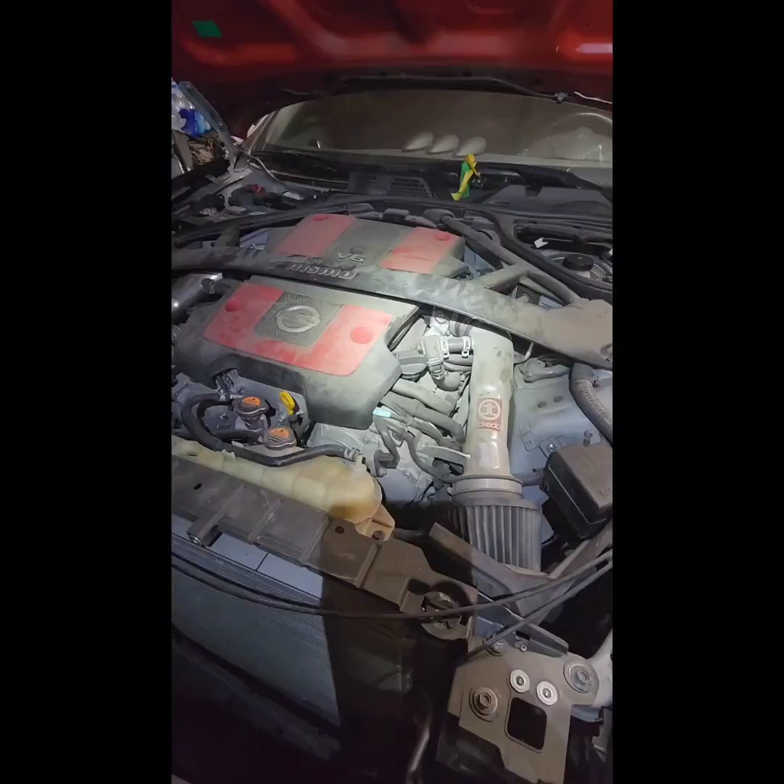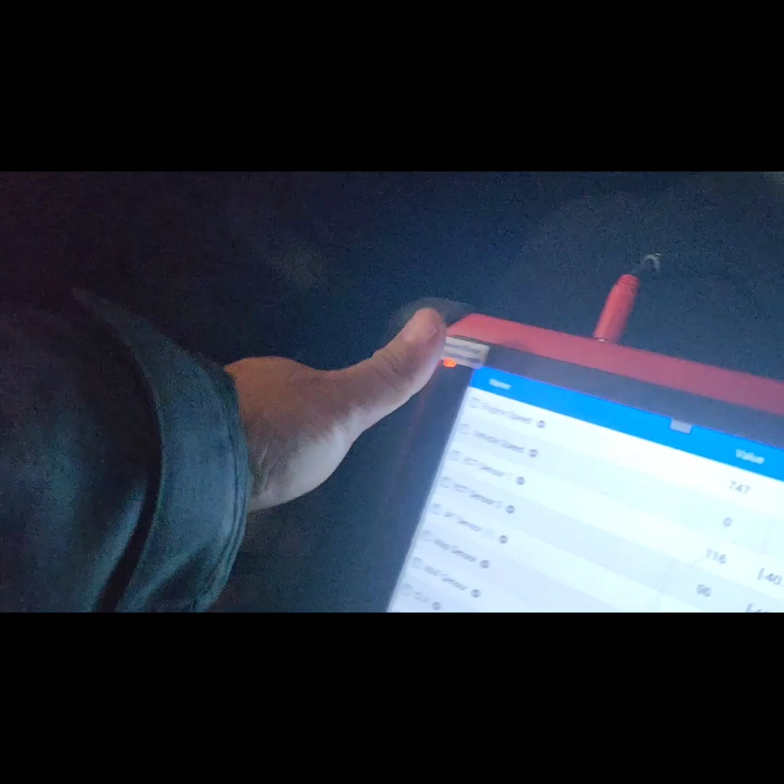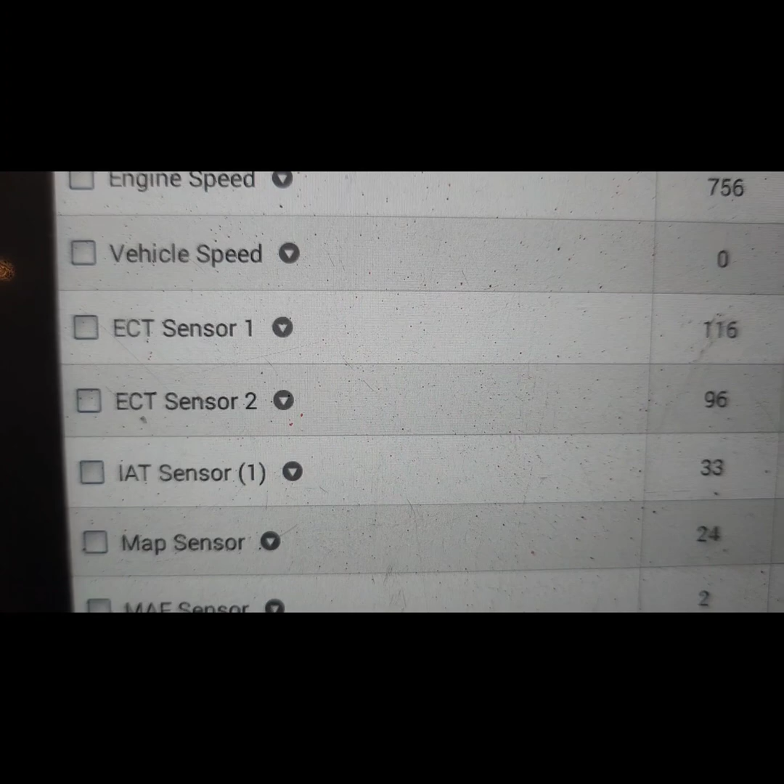Alright, so I got a check engine light on. See the temperature? It's almost on high. And I have a scanner here. So it says on the sensor one, 116 degrees. So it's overheating. And the sensor 2 is 96 degrees.

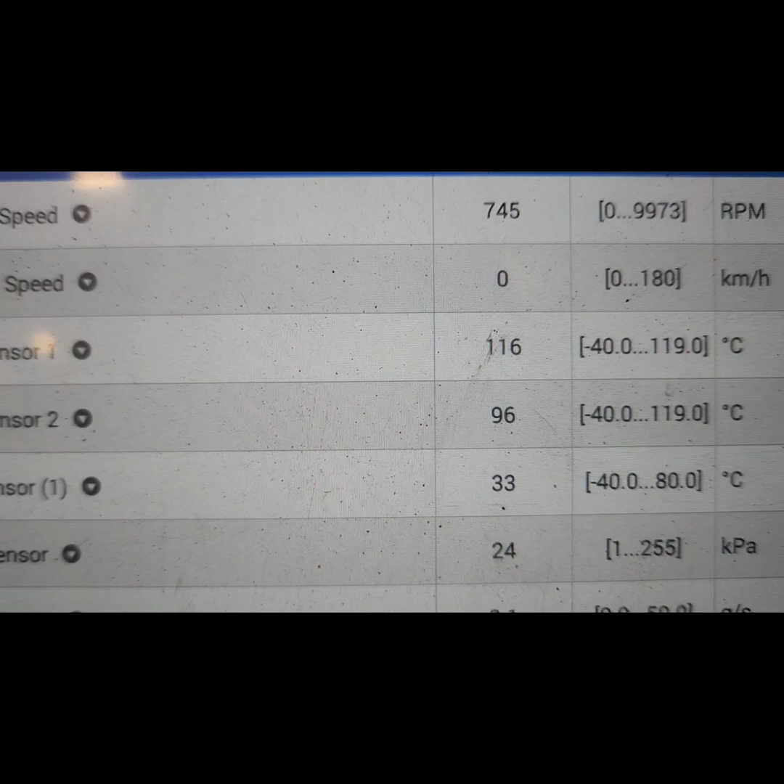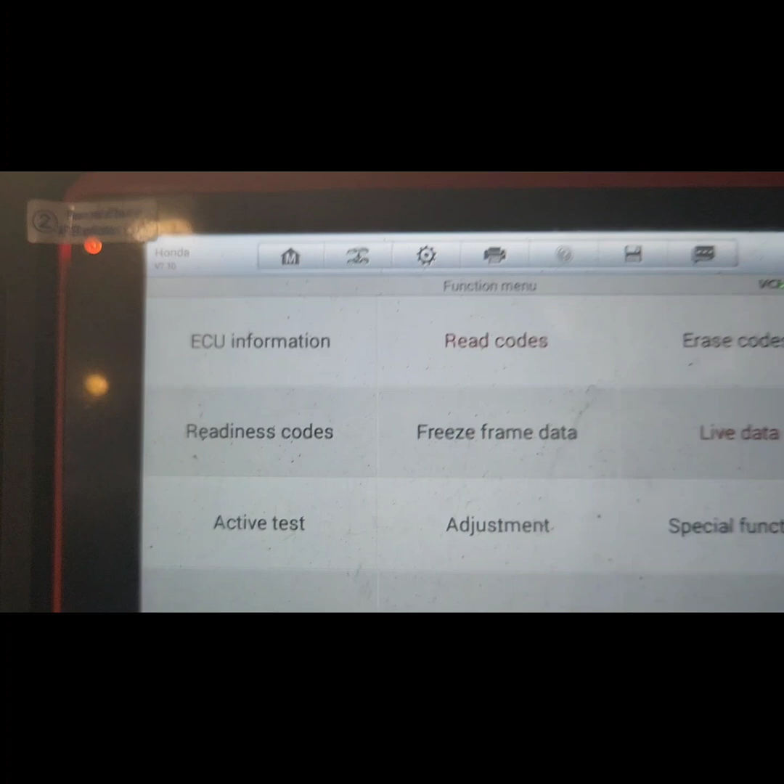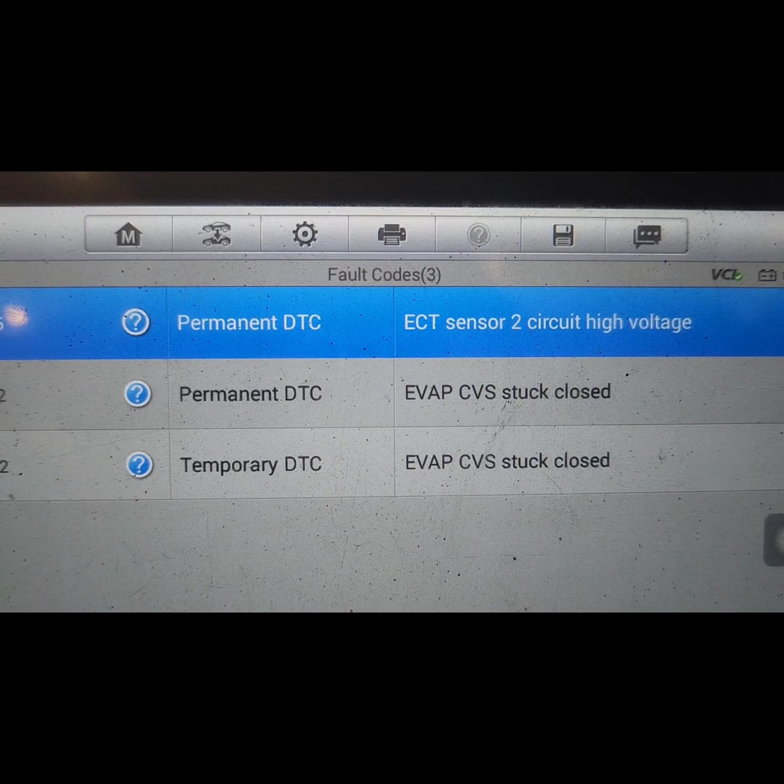So actually this thing calls on the code. It's calling for the P2185, sensor 2 circuit high voltage. So I'm gonna have to find out what's gonna happen, but most likely it's probably just the sensor.

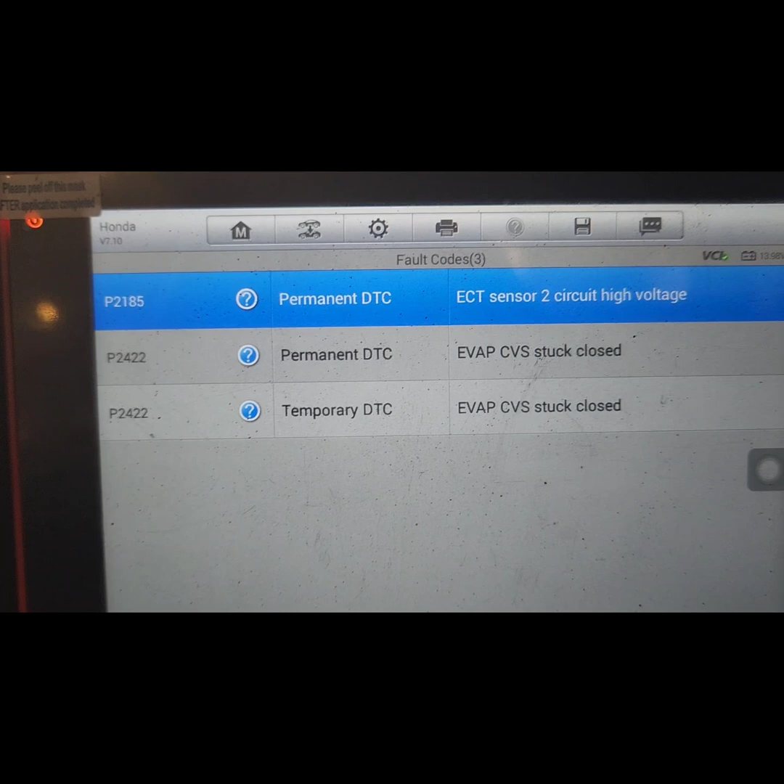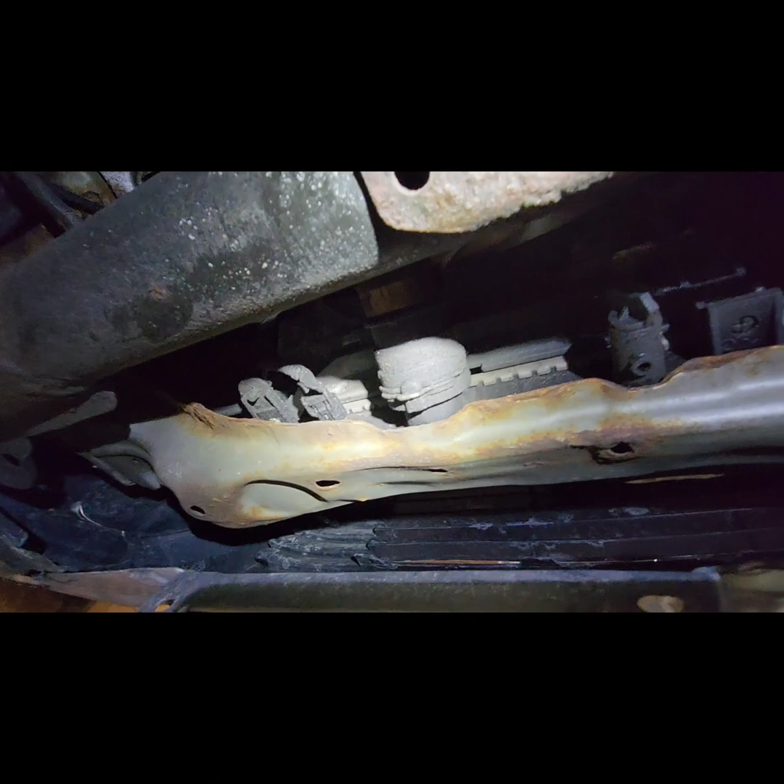So let's fix this. Alright, here we are underneath. So this is the radiator, this is the front of the vehicle, right? And the sensor is right here. This is on the driver's side. As you can see, this is the problem.

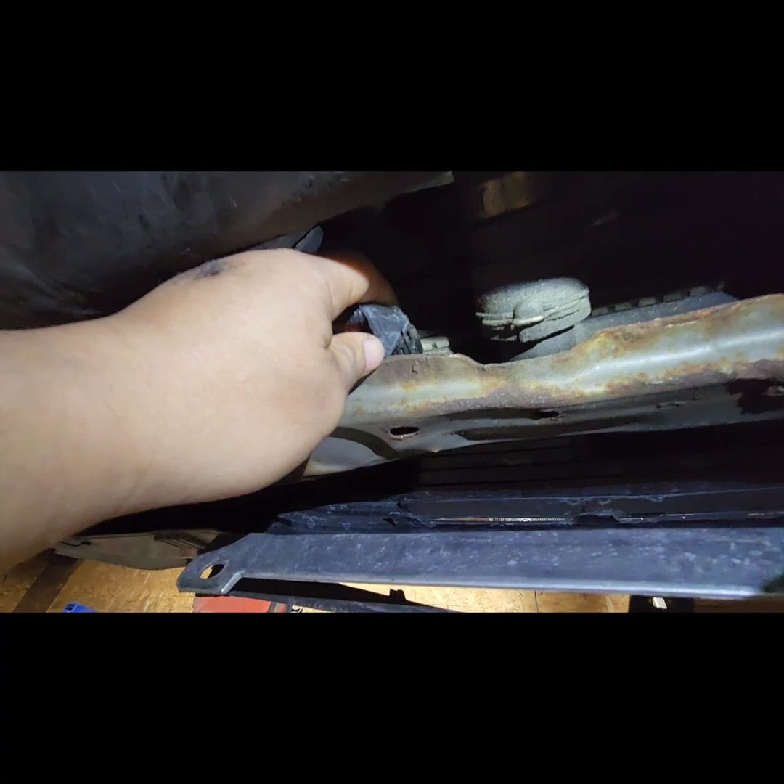So I might as well replace this because it's an old sensor. It's not that big a deal. It's not that expensive. So let's just unplug this, push this tab here, and kind of wiggle it out. It's gonna take time because it's sat there forever. Or you're gonna get a screwdriver.

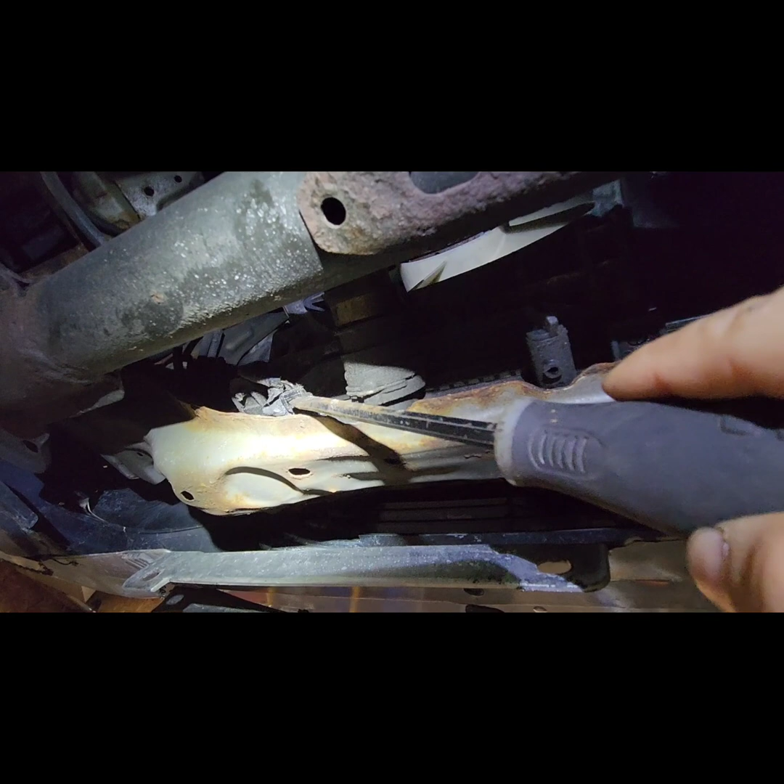So here we are with the screwdriver. As you can see, the tab is already pressed in, right? Because I pulled it out a little bit, so now the tab didn't come back. So all you have to do now is just pry it like this, just slowly. Not a lot of pressure. There you go. Right, so now it's out.

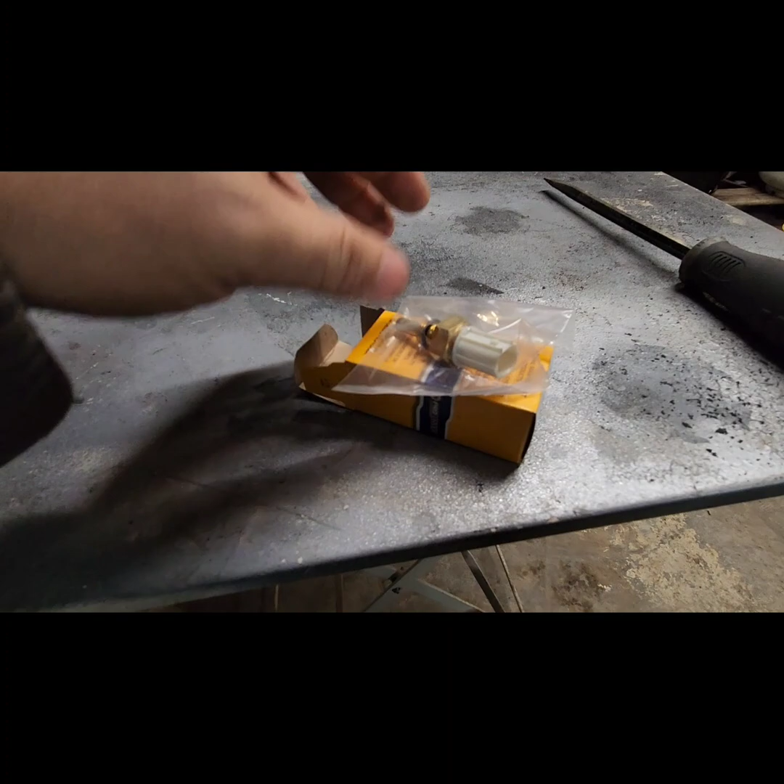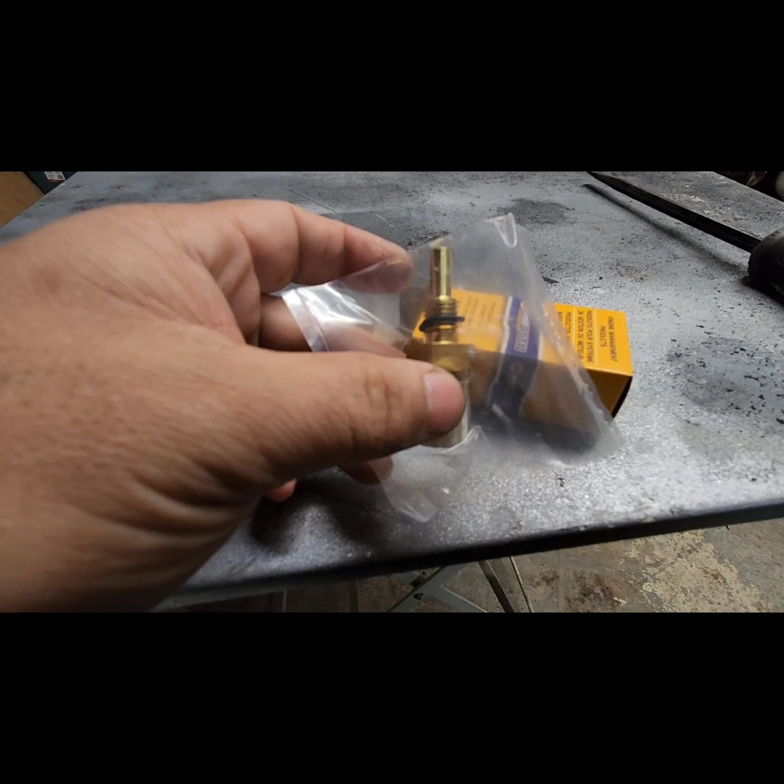So let's remove this sensor here and replace it. Alright, so here's my sensor, aftermarket sensor, right? So let's just hope that this sensor will work. Alright, so you're gonna need a 17mm wrench socket, deep socket, and then

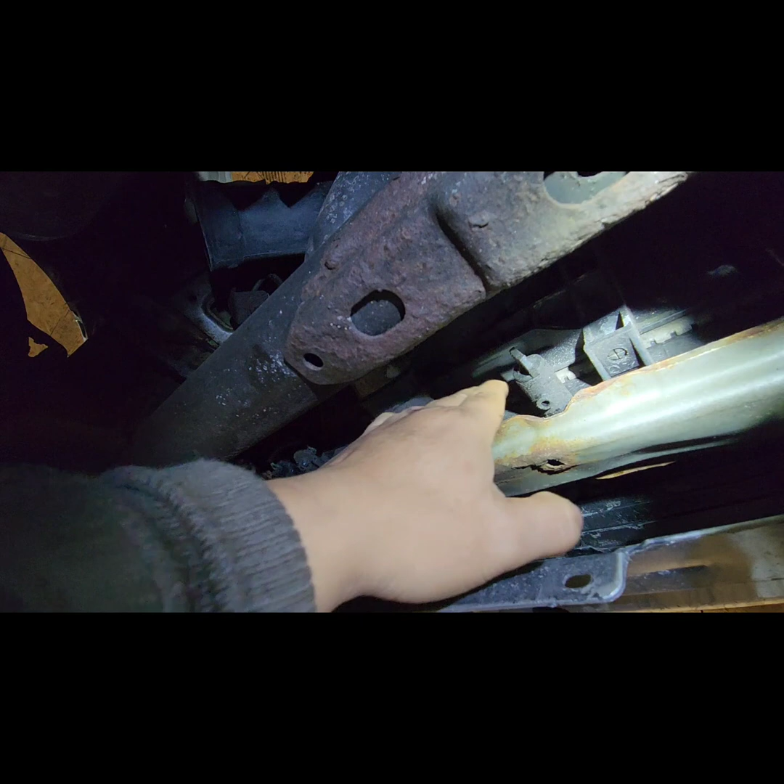you should loosen this. Now it's loose, but make sure you don't take the cap off the radiator, because if you do, all the coolant will come out. So leave the cap, keep it sealed, to minimize the coolant coming out, because it will have that vacuum.

And then we're gonna swap the new sensor right away, right? Because, well, normally you have to drain the coolant to do this, but I just replaced this coolant not long ago. So that's why I don't want to do that. So let's loosen this up and very quickly replace it with the new one.

Right? So put the sensor back as quickly as you can, and make sure you have the O-ring too on that sensor, right? Because it's got an O-ring there. Make sure you have a new O-ring on that sensor.

And tighten it up, and don't put too much pressure here, because this is plastic. The radiator is plastic, so just enough to seal. That's it. It's almost like hand tight. And put the plug in. And that should be it.

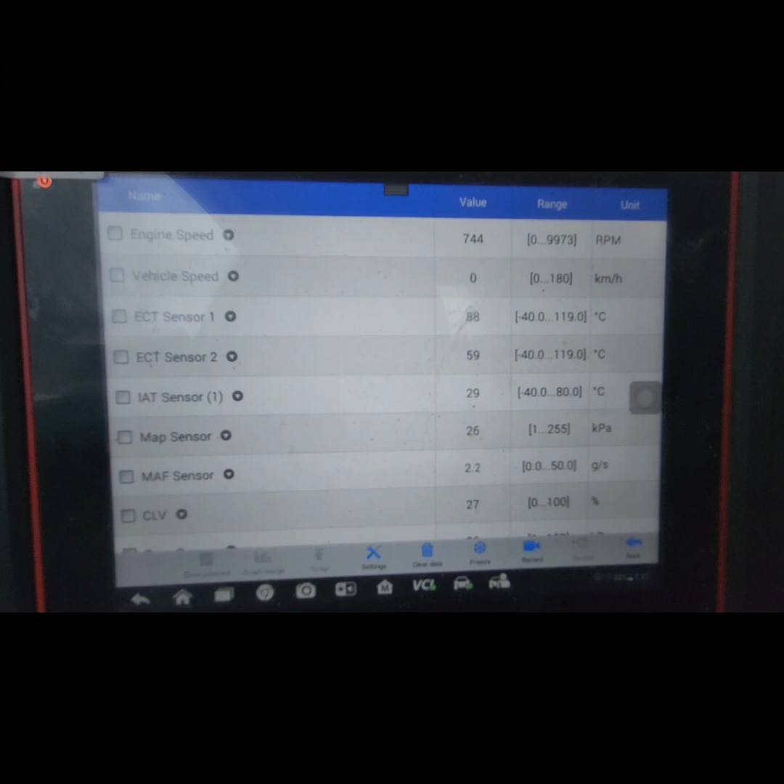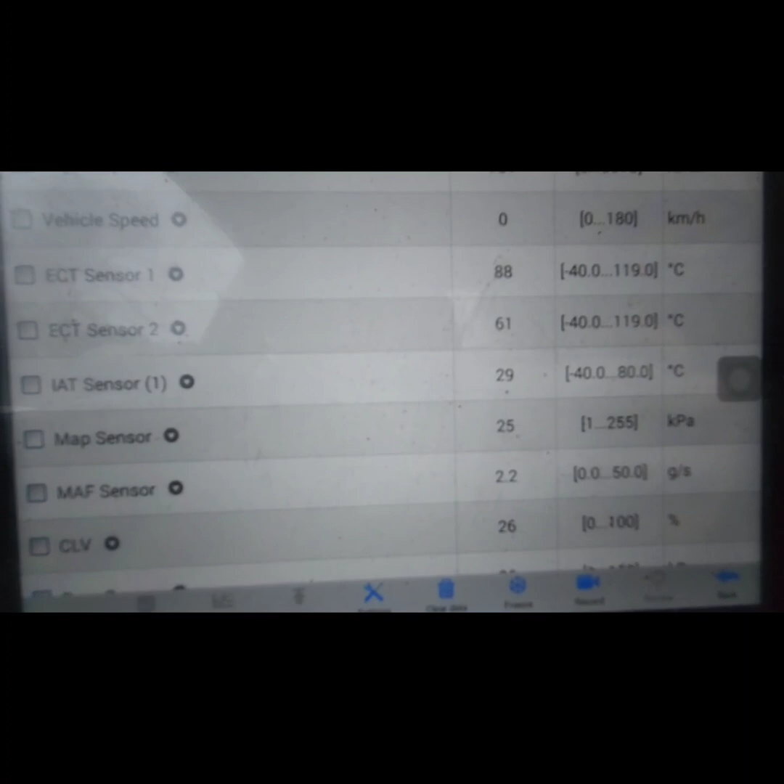Alright, so I drove the car. Look at the sensor now, the temperature is going up. So it's looking good. Before, it wasn't even moving. So I reset the alarm. It's not coming back now. So that's the fix. Thank you for watching.